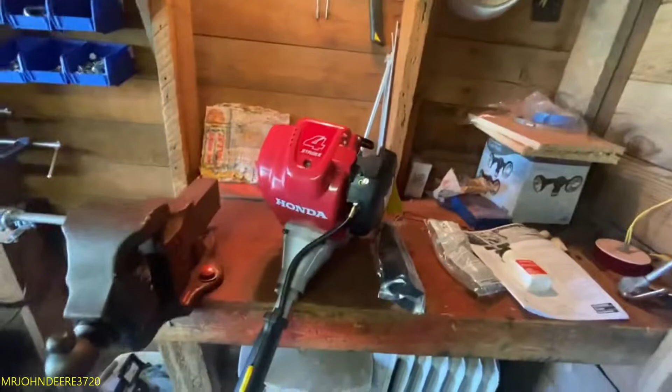My other new toy finally came. Had to order this off of Northern Tool, and it was going to take a little while. It was on back order, but they finally got it into stock. I got one more thing coming from there too, but that's still on back order. So I finally picked up a new trimmer, and this is a Honda HHT35S, their straight shaft, pretty much their biggest trimmer you can get from Honda.

This is the four stroke. The reason why I went with this one is because I wanted something a little bit bigger, and the way this one is, supposedly the oil and the fuel are separate now, not mixed together, which on the old John Deere trimmer - that one is now officially been parted out and retired because she didn't want to come to life this summer. So I went all summer without a trimmer, but nothing to really do about it.

So I bought this one. I was going to buy this from my local John Deere dealer, where I was going to buy the Honda snowblower from too, but apparently they don't do Honda stuff anymore. So I was pretty much forced to just go online and get this trimmer.

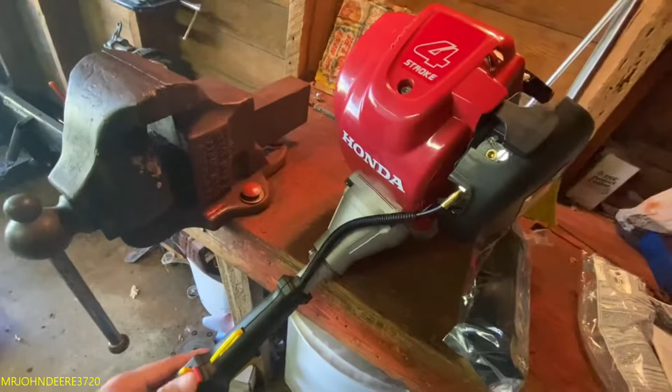So it's a 4-stroke, obviously, so like I said, you don't mix the oil and the fuel together. This is the type of oil that it takes, SAE 10W30. This is Honda oil, but you can probably get just some regular stuff at the hardware store, unless you want to try to find this online.

So it comes with oil, of course it comes with the book, comes with some safety goggles which will be handy, especially when I'm doing brush hog work. And then it has this, I guess, shoulder strap or whatever, so you can put all the weight of the trimmer on this instead of it being on your arms. So that's probably going to definitely come in handy.

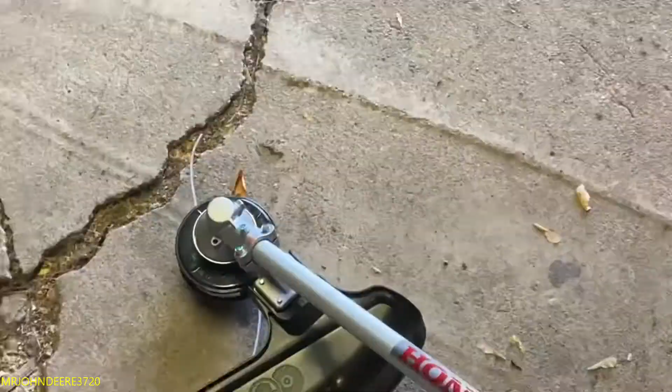I believe you can put other attachments on here too, but I think I'm just going to be mostly using it as a string trimmer. It looks like it already has some string in there - how much, I don't exactly know, but I'm hoping that I can put my John Deere string in here, because I got a big roll of John Deere string too, and I haven't even gone halfway through that roll yet. So I'm hoping it'll fit in this trimmer as well, so then I don't have to buy separate string.

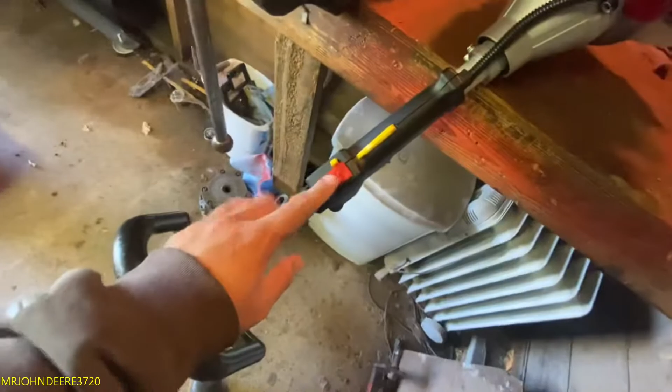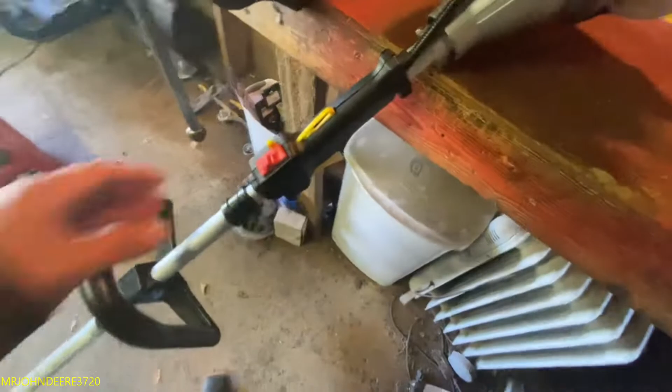So you got your on and off - this is just your off. And then your safety stuff that you need to push in, and that's for your shoulder strap. I believe this can be adjusted, may have to adjust that a little bit. The John Deere was further down, but maybe that's the issue why I didn't like it so much, but I don't know.

So you got a big huge fuel tank, and straight fuel goes in there, gasoline. And then your oil goes in this little guy, this little silver guy, and you have to fill it up to its proper level. They said there might still be a tad bit of oil in there, because apparently they test them before they ship them. So what it sounds like in the book, it takes this whole container, which will probably last me a couple of years, I imagine. I don't really know. And then just straight gasoline.

This has the Honda GX35 engine on it, rated for, I believe, 35 cc's, whereas the John Deere trimmer was 29 cc's. So obviously there's a huge difference in power. You can even see the head, the engine - it's way bigger than the John Deere.

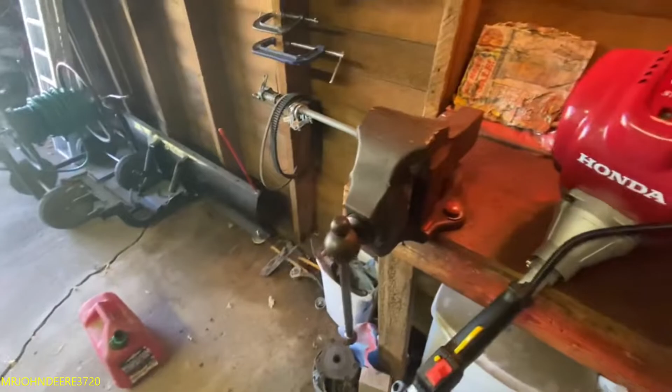So I did bring a little bit of gas, and of course the oil. We are going to attempt to fire this thing up and see if we can get her - see if we can even get it running today. There's not much trimming that I need to do anyway, but I just want to make sure myself that it's going to run.

I don't know what all this is... so this must just be a warning card. Of course, none of it's in English.

So right here, I guess, it's just a warning thing that there's no oil in the engine. So I guess what we'll do is I will flip you guys around, and I can lay you guys down, and maybe we'll get some oil added in this thing, and then some fuel, and maybe we can see if we can fire this bad boy up. So give me one second.

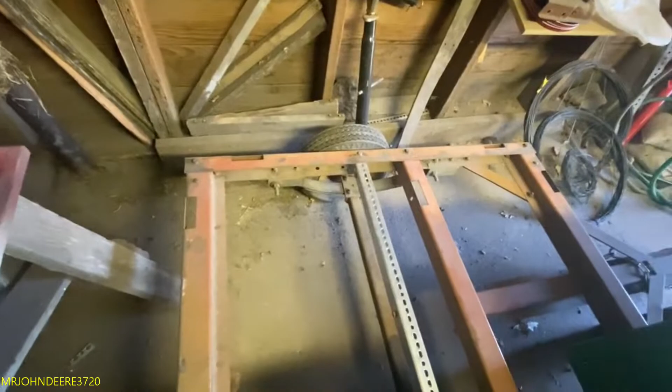Yeah, so this is the head off the old John Deere trimmer. It's still full because I filled it up last year. If I can take this string and put it into that trimmer, which I'm pretty sure I can do, it looks like it's about the same size stuff.

Yeah, so that's gonna be good then. I don't really want to have to buy a different kind of string just because I got a different style of trimmer now. I'd rather just use what I got. I'll have to mess around with it a little bit.

How do you like my redneck tripod? Gets the job done, though.

She's a quiet little sucker. Just out in idle, she's quiet, compared to that old thing. The only way I was ever talking to anybody, I had to shut that off. I think with this, I could leave it idling.

Unfortunately it's late in the year now. As you can see, the leaves are falling off the trees. We're in fall time mode now, and of course the leaves are dropping, so there's not really a lot to trim. There's a little miscellaneous stuff I can trim.

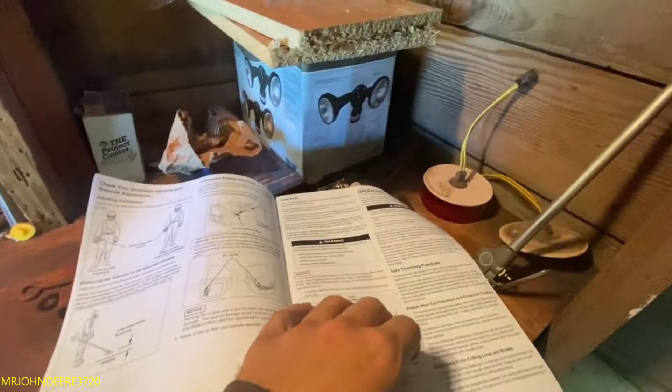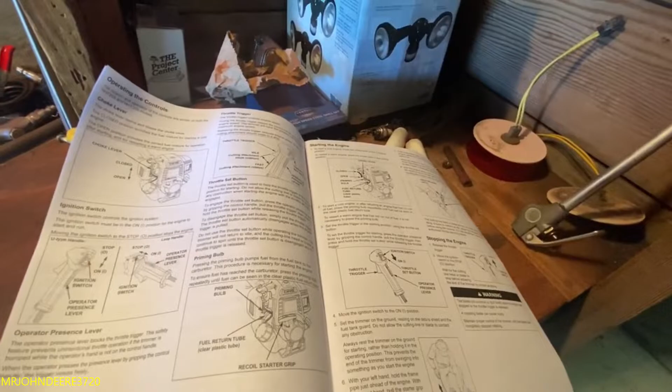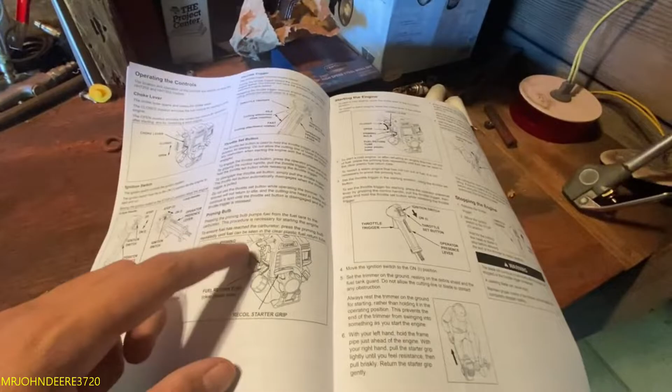But pretty easy to start. Just give it full choke and prime it with the primer bulb. I don't know how many prime pumps it's supposed to do. I know on the John Deere they said about 4 to 5 pumps on the primer bulb, and then you're good to go. I imagine it's about the same with this thing too. They have all their information in here, but not many people actually read them. Yeah, primer bulb, how many times do they say? Yeah, we know what it does.

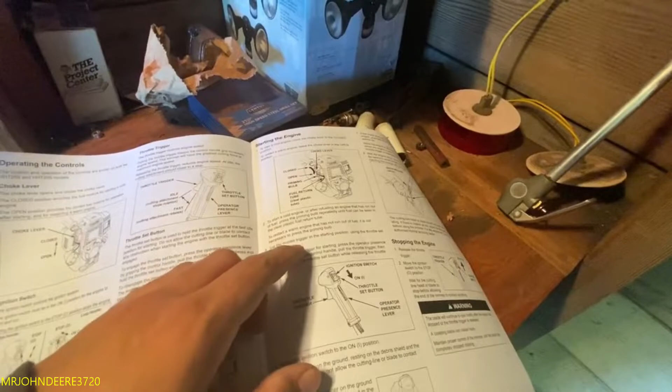To start a cold engine, it sounds like you just keep pushing the primer bulb until you see fuel in the clear line.

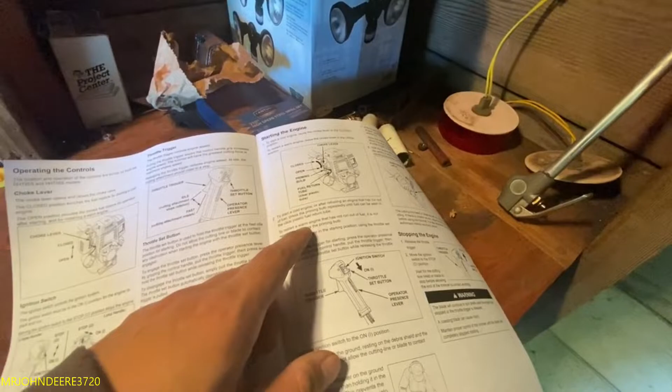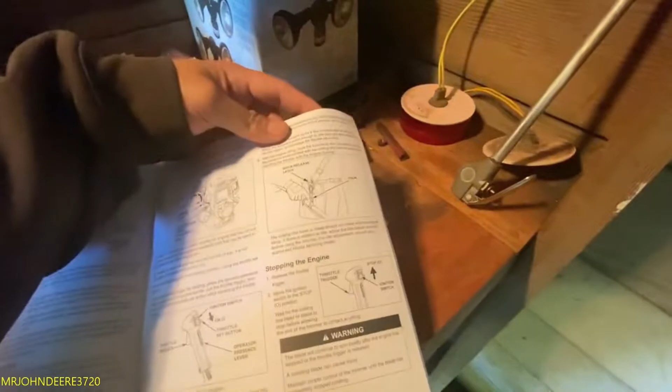Well, it looks like they don't really give out a number, you just keep going until you see fuel coming out of that fuel line. The John Deere manual said about 4 or 5 primes, but Honda just makes it easier, I guess, to say keep priming until you see something come out of the clear fuel line. There's a suction line and a return line - one of them is clear, and whatever one is clear, that's the one you look for. If you don't see any air in it, or you see it full of fuel, then you can go ahead and just start it.

But this thing starts so much better than the John Deere. Of course, the John Deere, towards the end there was getting hard to start, and then this year it just wasn't going to start. I even rebuilt the carburetor on that thing, put a new spark plug in, checked for spark - it had spark, checked for fuel - it had fuel. No clue why it wouldn't start. I'm thinking it's a cylinder issue, everything was bypassing the piston. Maybe the rings were wore out on it and everything was just slipping through, and it just wasn't firing.

It ran last year, but it was a biatch to get it to run. So I said, you know what, I'm done. John Deere, you've been a good trimmer, I've had you for 10 years. You were a little undersized for what I was doing - at the house it was fine, but when I was going to the farm and doing stuff there, it just wasn't enough power. But it did a lot of trimming, so I think it just got wore out. That one was only 29 cc's, and this new one is 35 cc, so definitely a lot more power.